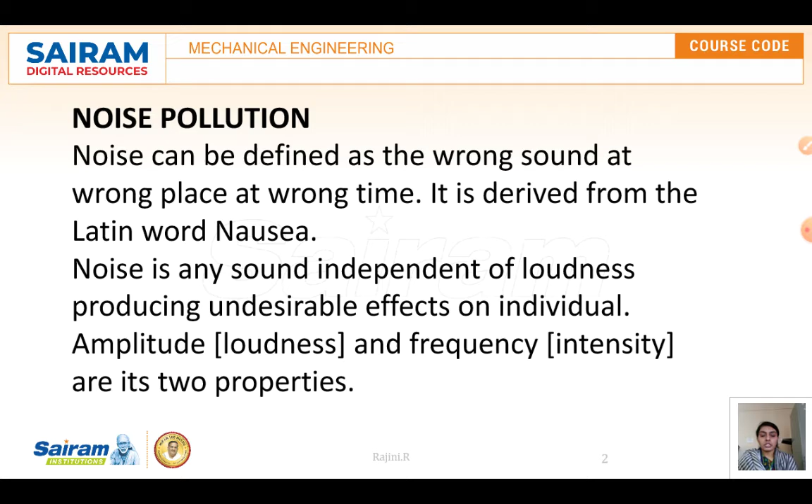Noise pollution can also be defined as the wrong sound at the wrong place at the wrong time, and it is derived from the Latin word nausea. Noise is any sound, independent of loudness, producing undesirable effects on an individual. Loudness, intensity, and frequency are the major properties of noise pollution.

If we want to talk about the sources of noise pollution, there are various sources. It may be indoor or outdoor, natural or man-made, or industrial. Traffic noise accounts for most polluting noise in cities, mainly in urban areas. There is also air traffic noise, construction site noise, catering and nightlife noise, and noise from animals, which can cause sleep and behavioral disorders.

The main concept for the industrial source: progress in technology, for example industrialization, has resulted in creating more noise pollution. For example, mills, printing presses, or engineering and metal works contribute heavily towards noise pollution.

In industrial cities, for example like Kolkata, often the industrial zones are not separated from the residential zones of the city, especially in the case of small scale industries. These will be very near to residential areas, operating from workshops located on the ground floors of residential areas, causing more noise, discomfort, and irritation to the residents exposed to the noise.

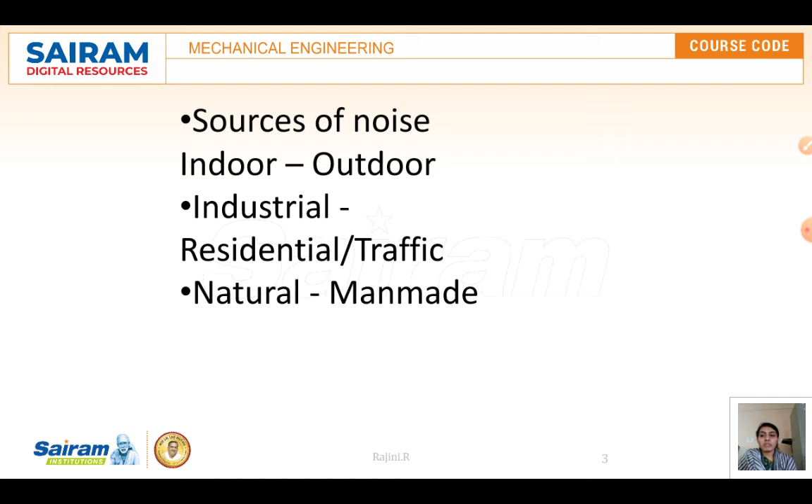Agricultural machines like tractors, tube wells, and powered tillers have made agriculture heavily mechanical but also heavily noisy. Noise levels of 90 dB to 98 dB due to running farm machines have been recorded in the state of Punjab.

The effect of noise is generally harmful, causing serious health hazards with far reaching consequences, having many physical as well as psychological effects on human beings.

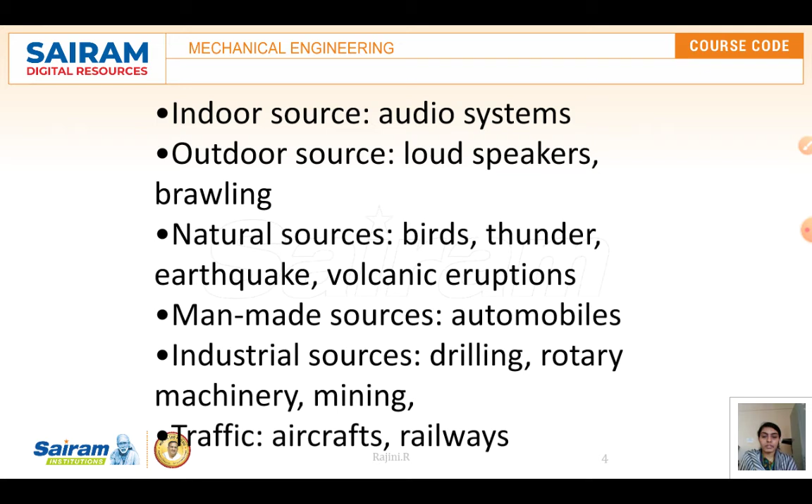Also, these standards we can see are noise standards, that is class, zone, and time, from AM separately and PM separately. Class A, that is industrial zone, is 75 dB. It should be there from 7 AM to 10 PM, and 10 PM to 7 AM it is 70.

B is commercial: 7 AM to 10 PM it is 65, and 10 PM to 7 AM is 55 dB. Under category C, residential areas, 7 AM to 10 PM is 55 dB, and 10 PM to 7 AM it is 45 dB.

And in category D, that we're considering as the silent and pleasant place, 7 AM to 10 PM is 50, and 10 PM to 7 AM will be 40.

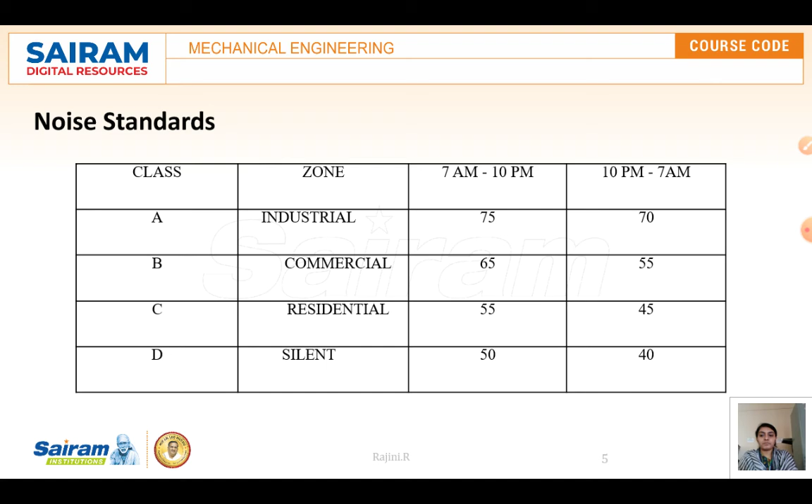Noise pollution limits at residential areas, as I said, is 55 dB, and industrial areas 65 dB, and commercial and silent zones like 60 and 45 dB respectively. The tolerance of noise level in cities is 65 dB, while normal permissible level will be 45 dB. Control of noise is to be achieved not only at the source but also at the receiver end.

That is also very important, via the transmission route and via application of rules and regulations, and maintenance of vehicular condition, utilization of silencers is also important. Also a ban on shrill horns, eco-friendly zoning, green belt development, and proper town planning.

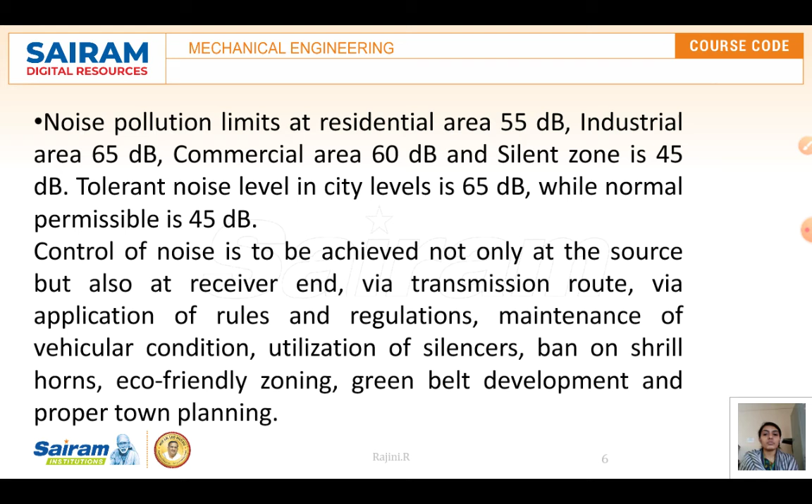So all these things, we may not fully achieve it, but at least we can reduce the noise pollution which is reaching from the source to the receiver. So care must be taken at the receiver end also, compared to the source end. We can take measures and reduce the noise pollution at the receiver end. Receiver end means that is our end.

Next one, water pollution. Precipitation is the primary source of irrigation water in the form of rainfall and snow. These give rise to secondary sources, classified as surface water, groundwater, or auxiliary water.

Water pollution can be classified, as I said, into surface, ground, and auxiliary water. For surface water or groundwater pollution, point sources have one identifying cause of the pollution, such as a storm drain or a wastewater treatment plant, or any drainage water entering the main source.

Non-point sources are more diffuse, such as agricultural runoff, waste, pesticide waste, all of it carried along until it joins the main source water. The effect can damage individual species and impact the natural biological communities that take part.

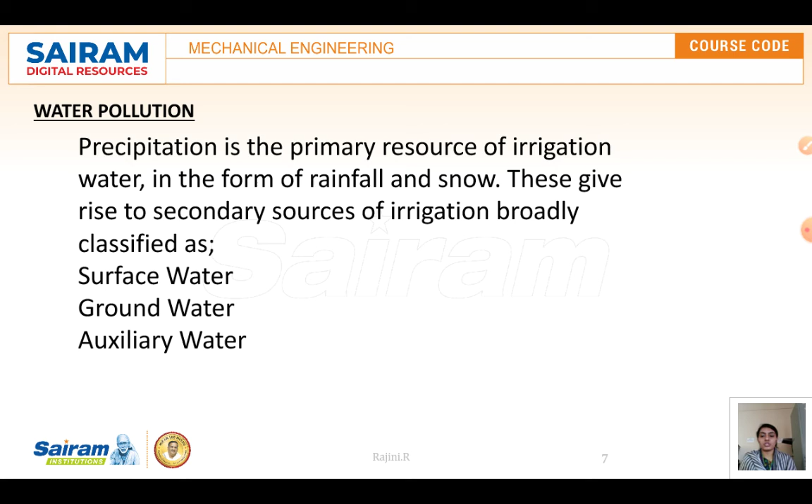Here, our total available water in the world is divided, and you can expect this question in the exam or internals, because they'll ask the percentage of each individual source. First, ocean is 97.6%, ice caps and glaciers are 1.9%, groundwater and soil moisture is 0.5%, freshwater lakes 0.009%, saline lakes 0.008%, rivers 0.0001%, and atmosphere 0.001%, totaling 100%.

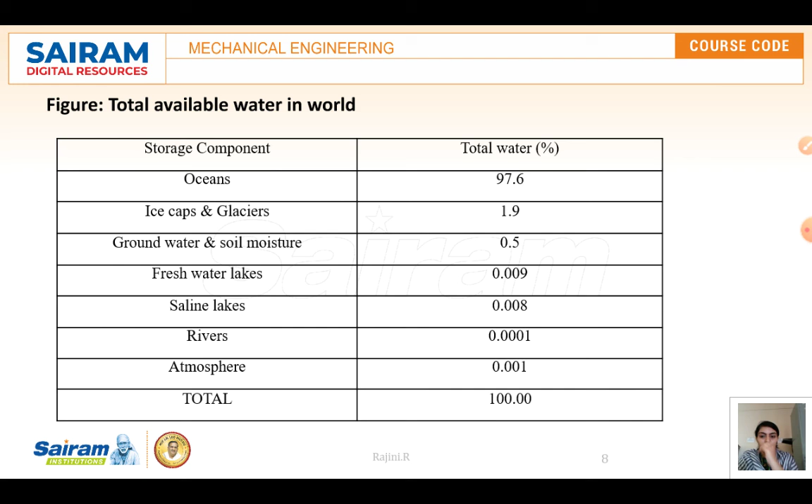So this is the classification of water sources on the earth. Uses of water—I think we all know the uses of water. Production use means the water is primarily used for irrigation of food crops, fodder crops, medicinal herbs, etc.

Consumptive uses means water is consumed in exhaustive quantities for domestic purposes such as drinking, cooking, washing, etc. Water also finds application in almost all industrial processes, from manufacturing to housekeeping, which is consumption. So that is separate from production use.

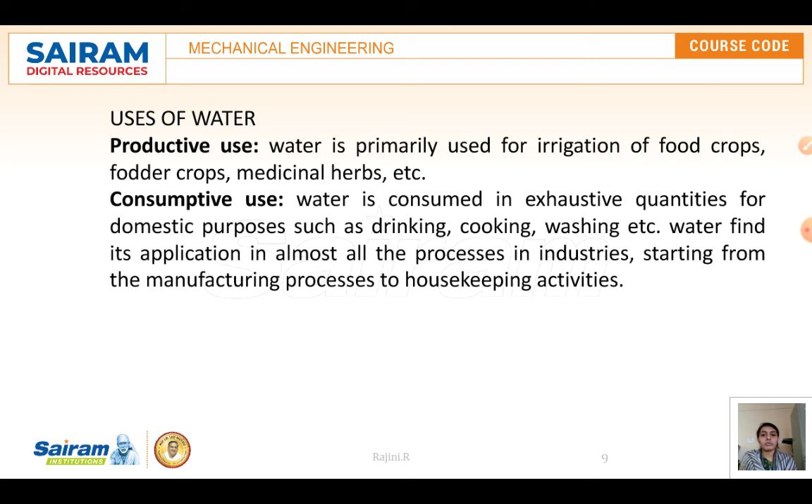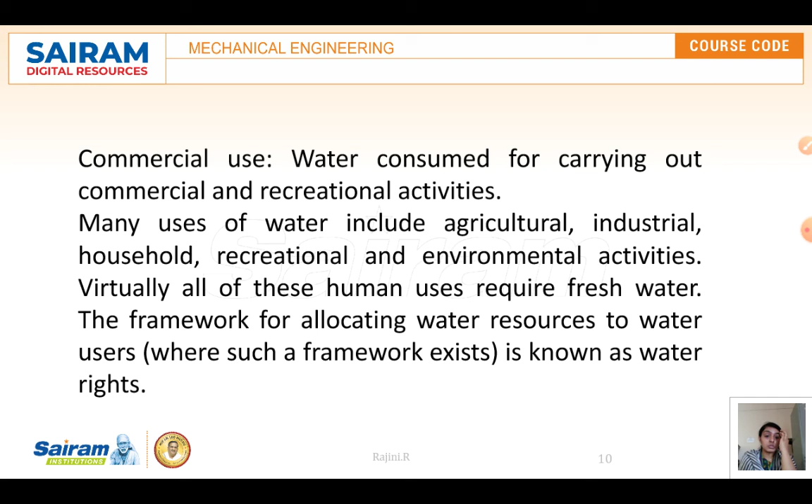In commercial use, water is consumed for carrying out commercial or recreational activities. Many uses of water include agricultural, industrial, and other household or recreational activities. Virtually all human uses require fresh water, and the framework of allotting water resources to users is known as water rights.

In agricultural use, it is estimated that 69% of worldwide water use is for irrigation. In some areas of the world, irrigation is necessary to grow any crop at all, while in others it permits more profitable crops to be grown and enhances crop yield.

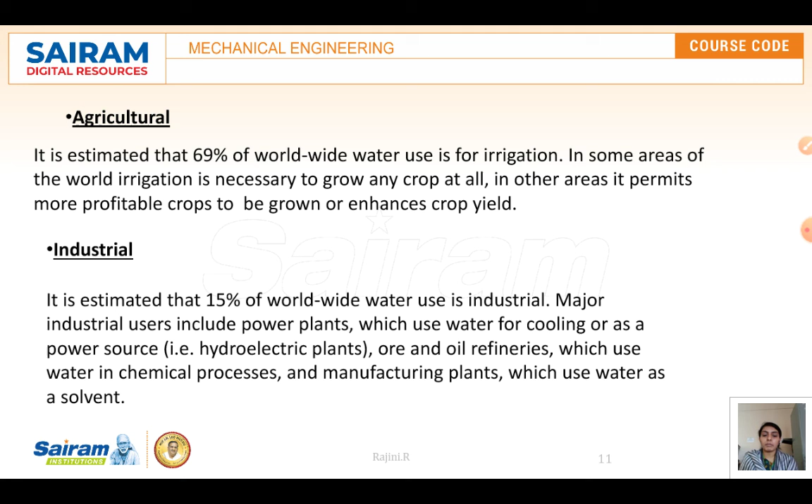In industrial use, it is estimated that 15% of worldwide water use is in industrial areas, and major industrial uses include power plants, which use water for cooling or as a power source, oil refineries, which use water in chemical processes, and manufacturing plants, which use water as a solvent. Thank you, we'll continue.